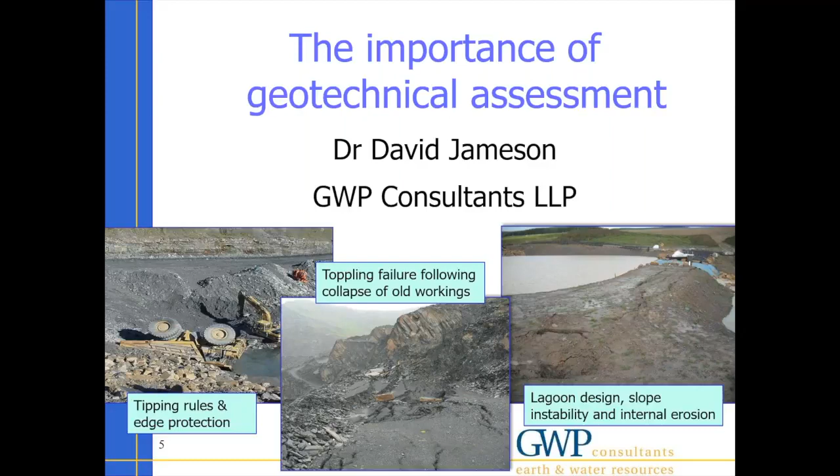So always when we're doing geotechnical assessments, we need to consider what lies below the site foundations of any excavation or tip. On the right hand side there's a slide showing cracking and a hole development in a lagoon. I'll come back to that later on. And then also integral to geotechnical assessment is the need to pass on any design criteria that come out of designs into your tip and excavation rules. So the need then for edge protection and having excavation rules that prevent you from going too close to the edge.

So the outline of today's discussion: I'm going to start off with what the definition of geotechnical assessment is in terms of how it's set out in the quarries regulations. I'm going to look back at the origins of the regulations, look at a couple of large instabilities which occurred, and try and derive from that the important aspects for design. Consider what goes into an adequate assessment and how it's linked to other areas of the regulations. The regulations themselves are well set out and flow quite nicely, but there are sections of it split up throughout the regulations that interact quite nicely, and I'll look at how I see those interlinked together.

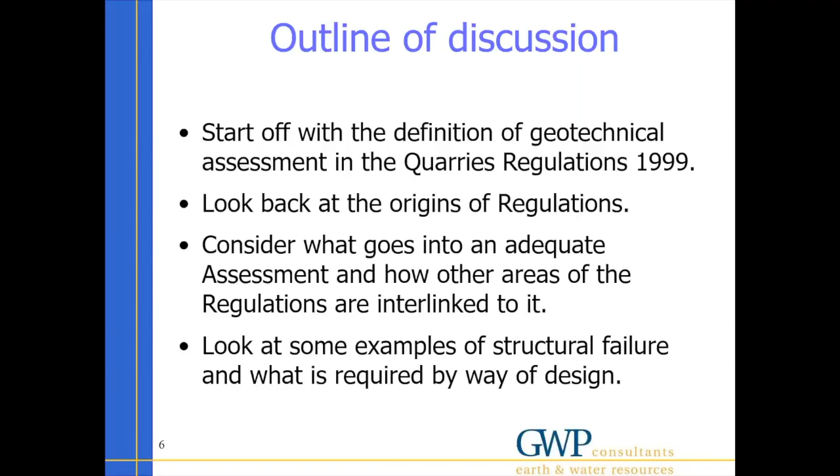We'll look at some further examples of instability to discuss the different mechanisms of failure and what we need to consider in any design. And then I've got an example, time permitting, of what goes into a design right at the end of a tip. So I'm going to deal with the definition of what a geotechnical assessment is first of all.

That's dealt with under Regulation 33 of the Quarries Regulations. It means an assessment carried out by a geotechnical specialist, that's somebody with relevant competence and experience, identifying and assessing all factors liable to affect stability and safety of a proposed or existing excavation or tip.

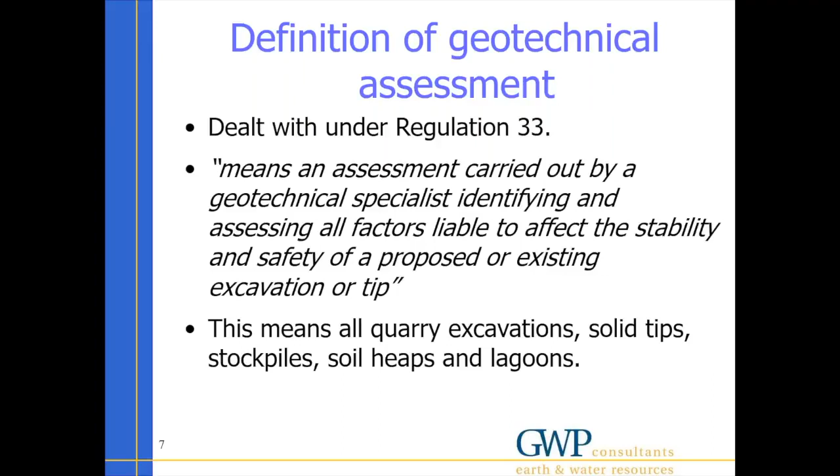And that means for any quarry, all excavations, solid tips, stockpiles, spoil heaps and lagoons need to be assessed. Essentially, what is required for a Regulation 33 report, a geotechnical assessment, and the basics of what goes into it is dealt with under Regulation 33. It includes details and particulars as set out in Schedule 1. I'll go through those in just a second.

It needs to state the conclusion of the report as to the safety and security of whatever structure you're talking about and whether it comprises a significant hazard as defined by the Quarries Regulations. It needs to say whether any remedial work is required and what timescales it's required by, and also what the date for the next assessment might be.

Also, it needs to review tip and excavation rules in order that any design requirements that come out of your design go back into the rules to make sure that any structure or excavation or tip is built according to the specification. Under paragraph 2 of Regulation 33 is a requirement for the operator to ensure that any remedial works set out in the report are enacted by the required date.

So just going back up to the top there, what you need to have in your geotechnical assessment report is set out in Schedule 1. It requires you to have a site survey, an up-to-date survey, an accurate plan of what's going on site, the boundaries of the quarry, and any structures that are significant on it, the site of any excavation or tip that's proposed, and any off-site areas contiguous with the site which might be impacted upon if there was a failure on site.

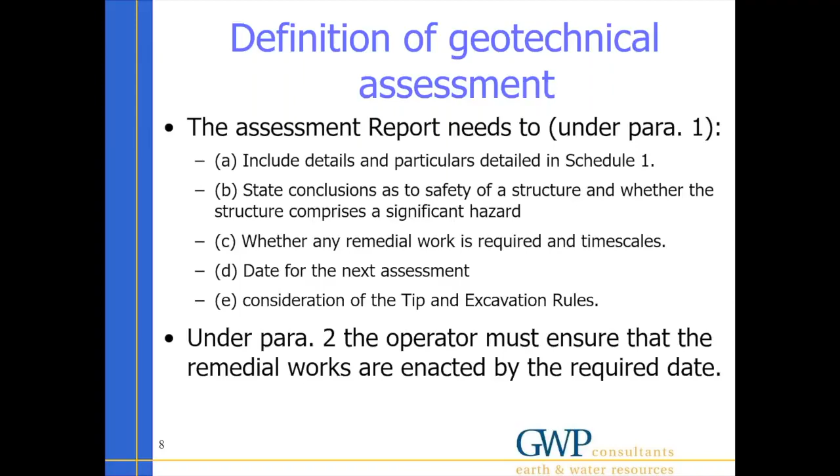I'm just going to jump back now a little bit to have a look at the legislation and how that's grown, and talk through a couple of large instabilities that have occurred in the past and the things that we need to consider in any design. The most infamous example of a slope failure is the Aberfan Tip 7 instability, which occurred 51 years ago or so in 1966, which killed 144 people, mostly children, when a large high face of colliery spoil material failed as a flow slide and engulfed not only the school at the bottom of the hill, but also houses and farm buildings higher up as well.

This large tip failure resulted when the loose tip materials, which were being tipped over the face, failed as a consequence of tipping directly over a spring, which increased pore pressures. The foundations of the tip were on a soft clay, so we need to understand the foundation conditions. It was being tipped over a pre-existing failure, so movement had already occurred, which might have further reduced the strength of the foundations, and tipping continued even following initial movements. Essentially, what the panel found in the inquiry was that there was no design or thought gone into the tip requirements at all.

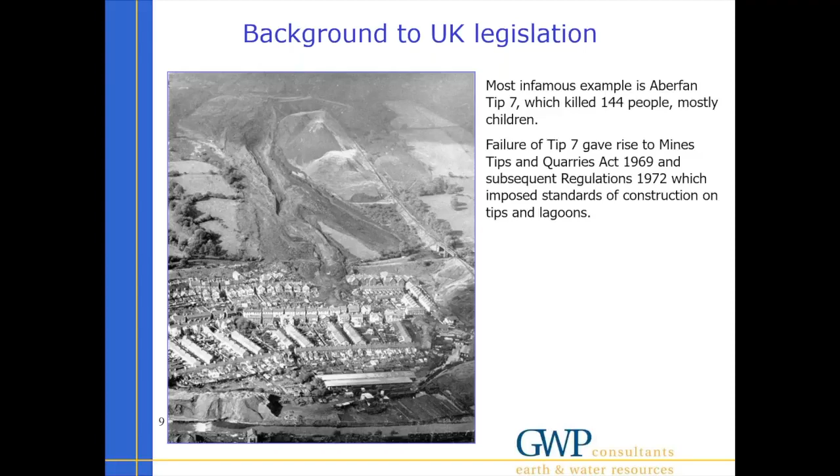This failure led on to the Mines and Quarries (Tips) Act of 1969 and the subsequent regulations in 1972, which imposed standards on the construction of tips and lagoons, but not necessarily excavations. This next slide shows the failure which occurred in 1988 at St Aidan's open cast site, just south of Leeds. Some of you may remember this. It was an extremely large slab slide which occurred as a consequence of a number of factors.

And the strata here was sub-horizontal, so fairly flat, and movement occurred because of the presence of a weak shear, pre-sheared horizon, which was only a centimetre or two thick, just adjacent to one of the coal seams. Old workings from deep mine workings in the past had resulted in a strain zone at the back of that slab, coincident with a number of faults.

And once water had got into these faults, it heaved the whole 1.62 million ton slab into the open void of St Aidan's and caused a mass flooding of that site at that time, and caused the river to flow backwards and produce a 70-metre deep lake in the matter of a couple of months.

It was that failure that led on to some of the research I did for the coal board back in 1990 or so, essentially on the position and strength and character of these weak shear zones that lie at the bottom of coal seams, or adjacent to coal seams, sometimes at the top. But that disaster, or that failure, led on to the Open Cast Code of Practice for slope design, which was the precursor to the Quarry Regulations 1999.

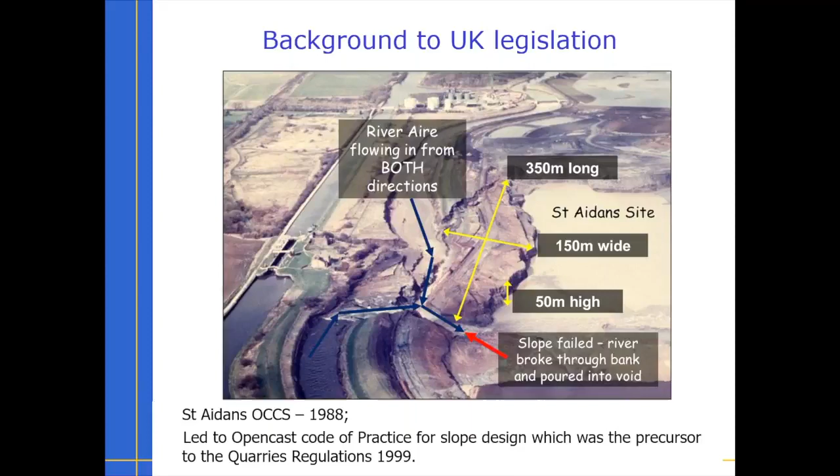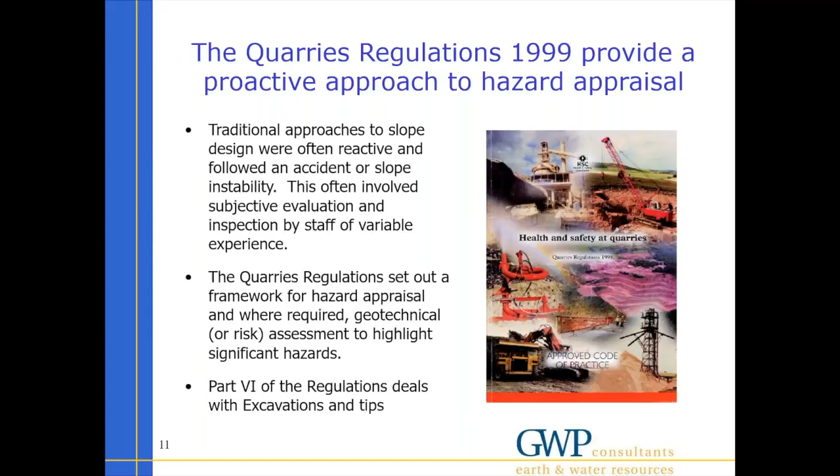So these regulations have been in place since 1999, and whereas traditional approaches to slope design often were reactive and followed an incident, and thereafter involved subjective evaluation and inspection of the incident by staff with variable experience, what the Quarry Regulations set out to do is impose a framework of hazard appraisal and risk assessment to highlight where significant hazards are, and then have a proactive approach to design. So when it comes to what I'm talking about today, which is the design of excavations and tips, these are dealt with under Part 6 of the regulations.

Regulation 30 deals with the design of excavations and tips, and essentially says that they need to be designed, operated and maintained to ensure that no movement occurs which might have an impact on health and safety. This is achieved through appraisal and assessment. Every structure on site, that's any excavation or tips including solid materials and liquid materials, have to be appraised under Regulation 32. And once they've been appraised, if any of those are seen to be significant hazards as defined by the regulations, then you need to do a geotechnical assessment. And that assessment report, I've been through what you need to address in those.

And linked to that, of course, once you've done your design, you need to get the essential details back into your excavation and tipping rules. That's detailed under Regulation 31. Once you start to build or construct your structure, you need to inspect it properly, and people need to be adequately trained to know what they're looking for.

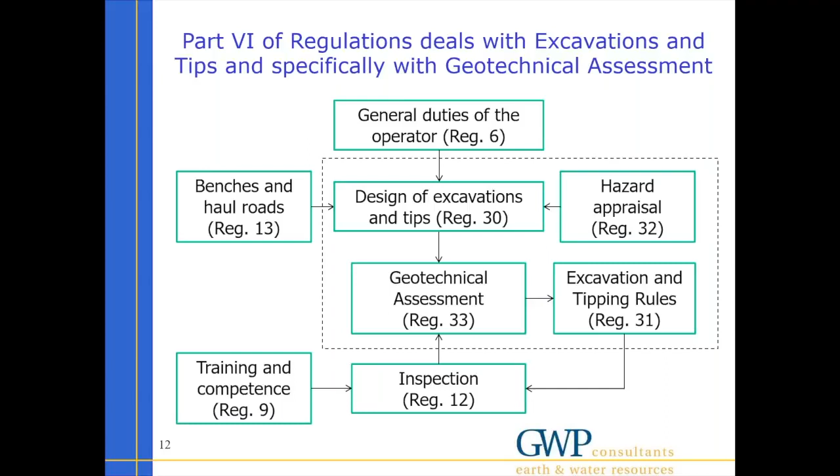So now I'm going to look at a number of different examples of things that might have gone wrong on site, just so we can hopefully highlight the different conditions, the things you need to think about when you're observing failures, and also what needs to go into a Regulation 33 report from a design point of view. Following the Aberfan failure, the regulations required that tips had to be designed and constructed in a certain way. There was a lot of work back then to put right numerous tips which were failing in the past.

And the next example, the largest slope failure that I'm aware of, occurred in the Hatfield Colliery, another colliery tip, which occurred adjacent to the Main Line Railway in 2013. It's probably significant that this occurred some 50 years or a generation later than the Aberfan failure, and it's possible that some of the lessons of the past have been forgotten, perhaps. So this large slope failure occurred in colliery discards, which is essentially a reasonably strong material.

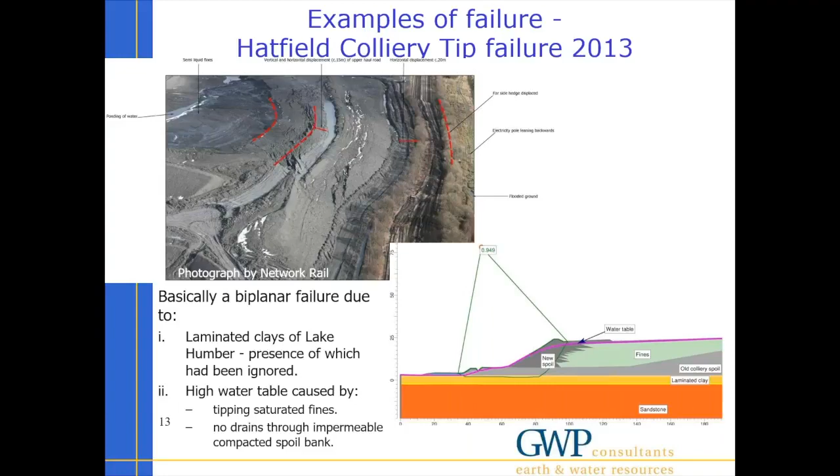But the failure, which is a biplanar failure, essentially occurred because of the presence of laminated clays in the foundations, the presence of which had been known since the 1970s but hadn't been included in more recent geotechnical assessment reports, and the high water tables within the structure caused by the tipping of saturated fines behind an impermeable compacted containment spoil bank at the front, and the lack of the introduction of any pore pressure relief or drains within

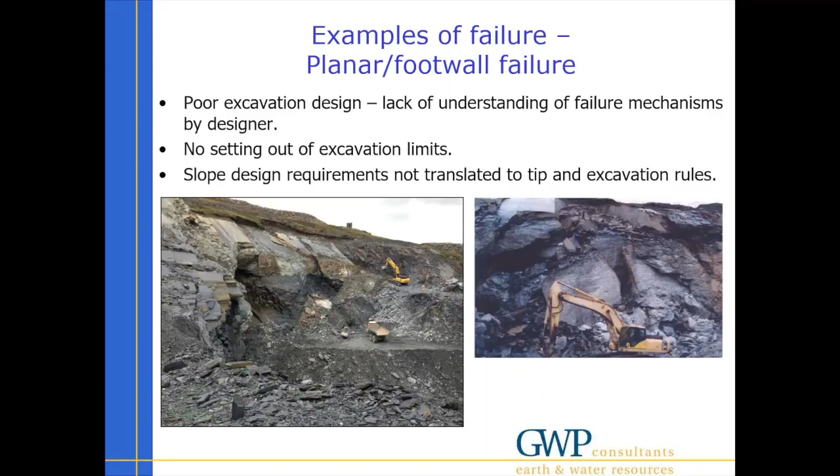So not only was it set out poorly, but the design requirements hadn't been translated into the tip and excavation rules, and the guys working on site weren't aware of what these were, the limits of the excavation design, and what the failure mechanisms might be.

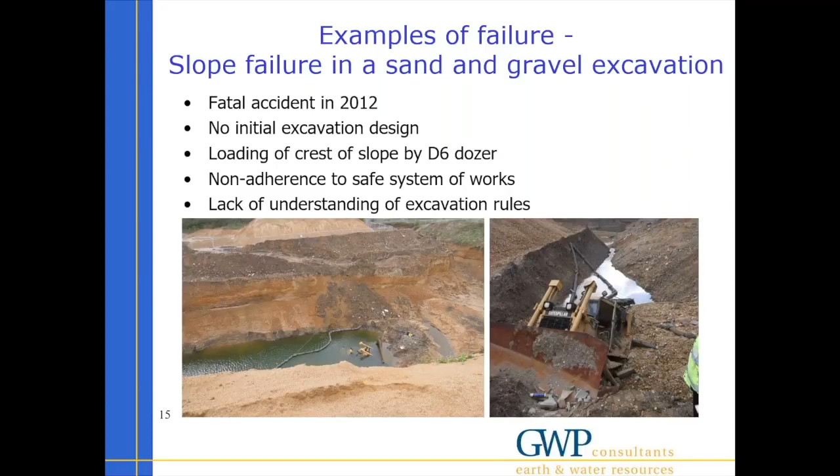I wanted to also show that it's important to do appropriate designs for sand and gravel excavations. There's an example of a fatality which occurred following the collapse of a haul ramp being installed on an oversteep, deep slot formed in sand and gravel. Here, there was no design for the initial excavation. There was some loading of the crest of the excavation by the dozer as it was pushing down a ramp and running parallel to the side of the face. So a lack of understanding as to how slope might fail, and poor translation of possible failure mechanisms into the tipping excavation rules. I'm just hurrying this up a little because we're going to run out of time.

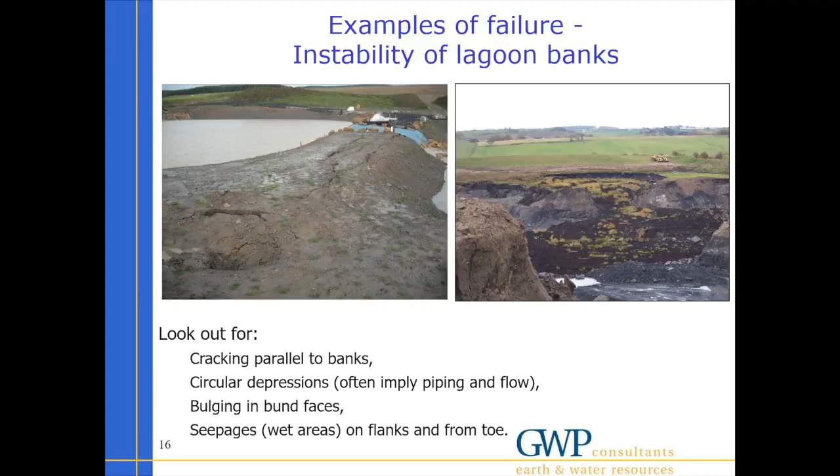But more worryingly, there's a circular void beginning to develop at the near end of the photograph there, and that's a consequence of internal collapse of the lagoon from internal erosion and piping out of fine materials from the slope. So whenever you're looking at lagoons, you want to be looking out for cracks, circular depressions, bulging of the faces, seepages out of the flanks, especially if it's carrying fines material. All of this information should be translated across into your tipping excavation rules.

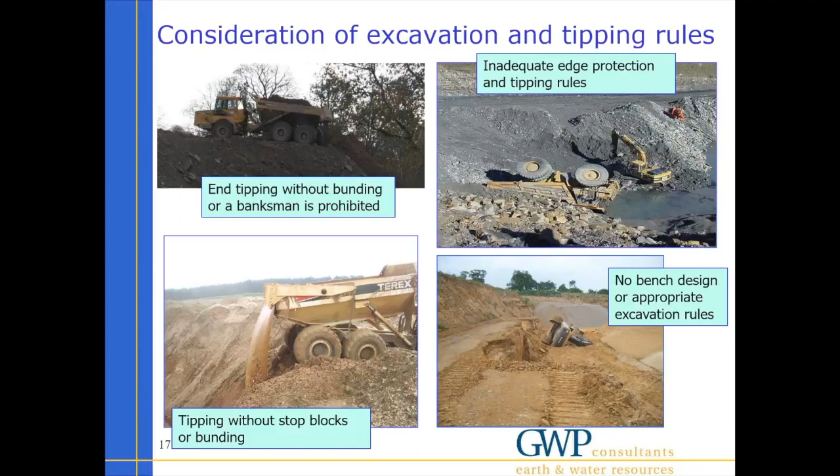Right in the bottom right-hand corner, there's an extreme example of inadequate bench width, in that the excavator's tried to track out, and there's been no edge protection and loading of the slope, and the excavator's fallen over the front of the face. So I don't know where we are for time.

I'm going to go through very quickly the last few slides just to show what considerations you have to put into any particular design. The geotechnical assessment requires, when you're constructing or considering design, an understanding of the final and fundamental requirements. What are you actually going to be constructing? How long is it going to be there?

What's downslope? What are the risks associated with the positioning of a hazard? There might be a high risk or higher risk of positioning it above a school rather than in the bottom of a tip, in the bottom of an excavation. We need to consider any foundation preparation, what needs to go into that, what you're actually putting a structure on, what the ground and surface water controls might be, what are the likely pore pressures that are going to be building up within the tip, both during construction and in the longer term.

We need to have a good understanding of what the materials are that are going to make up a slope and how to design, or what the strength of those might be, in order to adequately assess what is going to be suitably secure for the long term. And not just for the long term, we also need to consider how it's going to perform during construction.

When you're tipping, for example, very fine materials, clays, if you build up a slope too quickly, internal pore pressures don't have a chance to dissipate very rapidly, and therefore you can get high water pressure induced failures, and therefore you might need to build into whatever tip you're designing some pore pressure relief drains.

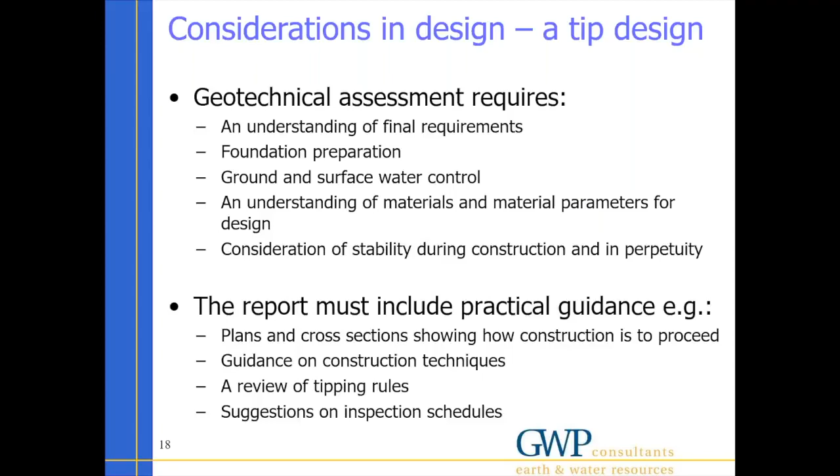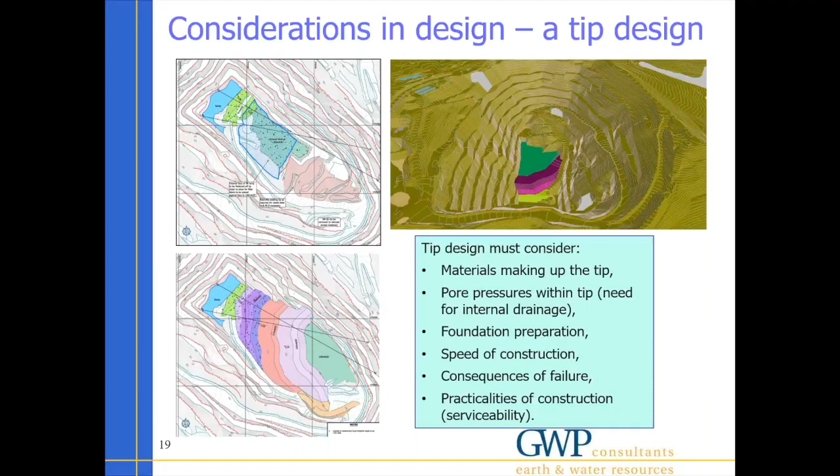Also, we need to be cognizant of serviceability. How are we actually going to get onto the tip in the future to make sure that if there's any remediation that needs to be done, it all remains accessible. So a number of plans are required to show how the tip's going to be constructed, but also included in that has got to be, is it practical to construct it to the final design? So a number of snapshot views of what's going on are required to show you how you're going to build it, and are you going to have access to the slope at all times.

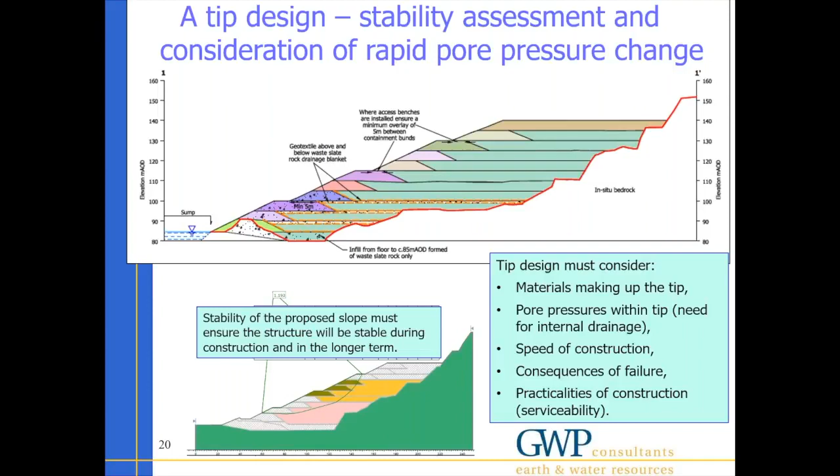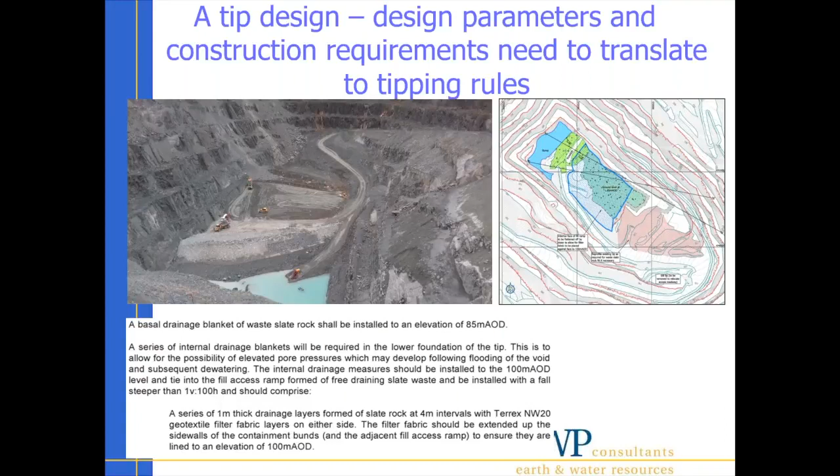Just one last slide to finish off. I've talked about it already, but once you've done your design, you've got to get that information back into the tipping and excavation rules to make sure that everybody who's working on the construction of the tip knows how it's going to be constructed properly, where any drains are going to be, what the compaction requirements need to be, to make sure that it's built to the required specification. Just a photograph to show this tip being constructed in the bottom of the quarry.